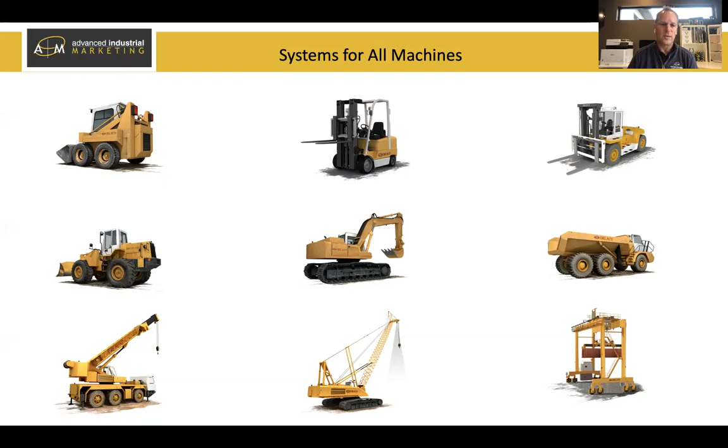One key thing we always urge customers to think about is most of your facilities have many different types of machines. Everything from small golf carts, which we don't have pictured here, all the way up to material handling cranes, many forklifts, many bobcats—there's a wide variety of machines in many industrial sites. It's important that we take a holistic view. We know you want to protect the material handling operations, but it's not always the case that every technology applies. One size certainly does not fit all.

We urge you to think about what type of machine you're applying this technology to, and how is it used. Is it indoor or outdoor? Then take a look at what you're trying to protect. Are you trying to protect people? Obviously, that's the leading cause. But are you also trying to detect other machines? Are you doing people-to-people detection, people-to-machine detection, machine-to-machine detection? Are you also concerned about damage, about hitting key infrastructure in your plants?

There's a lot of times customers come to us and say safety is my primary reason, but we'd also like to reduce damage to our machines and reduce in-plant damage. We had a use case last year where we had multi-million-dollar damage to a facility because a utility pole was knocked down in a yard. So what are you trying to protect? And that's not always the same depending on where the operation is in your facility.

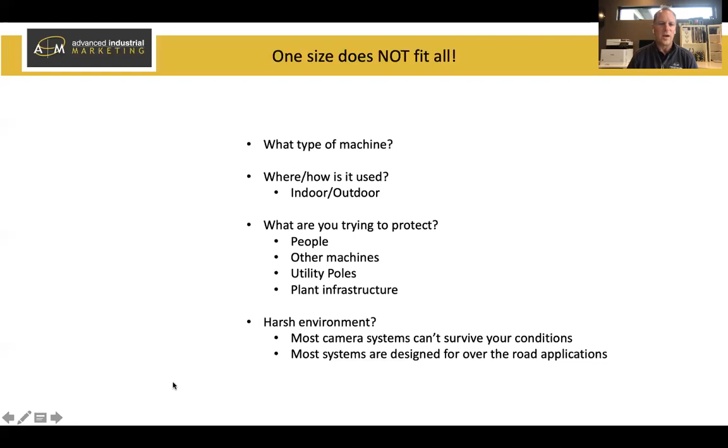And lastly, one thing we always urge our customers to consider is the environment. Most camera systems aren't designed for heavy industrial use. Most systems are designed for over-the-road applications, and there's a plethora of technology being pushed into the industrial segment that's just not designed to last. There's high shock and vibration ratings, high temperature ratings that I urge you to look at when applying this type of technology. Most over-the-road applications, your cars, have shocks and rubber tires. The overall vibration is not nearly the same as on an industrial forklift that has no shock system, no suspension system. Keep that in mind as you think about what type of technology to apply.

We're seeing a wide variety of technologies being applied in the industrial segment, and as I mentioned, most of that is being driven from the commercial sector. All cars sold in the US now have to have a backup camera on it, it's part of the federal mandate. But you're seeing a lot more with blind spot detection systems, backup warning systems, lane departure systems. All of that technology is now available for the industrial segment, being applied to forklifts, little bobcats, golf carts, and large machines. We're seeing a wide variety of technology being deployed on the industrial floor.

I'm going to briefly talk about each of them and give some advice based on what we've seen on how they are applied. Essentially, I broke it down into two groups. We've got non-proximity detection systems, which are your basic camera systems, and we also lump in wireless camera systems because we're seeing a lot of those applied in the industrial segment. And then we have proximity detection systems.

Basically, we're seeing four different technologies being deployed for proximity detection systems: ultrasonic, radar, vision, and RFID based, and they're priced in that order. So the lowest cost are ultrasonic, and the higher end stuff is vision based and RFID based. Let's jump into each of these technologies and talk about how you can apply them in your facility.

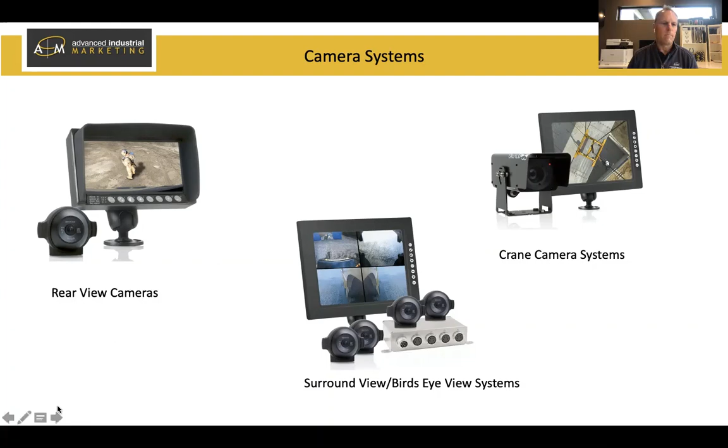Wireless camera systems are becoming more and more widely used. The reason we're having success deploying them is now we can put cameras in places they haven't been before, on lifting hooks, on stations that a forklift accesses only routinely, and we can wirelessly transmit to that forklift operator cab.

We can have wireless trailer systems. Many facilities have trailer jockeys running around, and those cabs may pick up trailer A today, trailer B tomorrow, or trailer A now and trailer B in an hour. In the past, it's been very difficult to link up to camera systems on trailers, but with the advent of new wireless technology, it's very easy to have operator views of many different trailers.

I also mentioned wireless load view systems. We're seeing wireless cameras basically on hook blocks of cranes and other load view systems where now we can wirelessly transmit that signal not only to the operator cabin, but back to a central processing unit, back to overhead cranes. We're seeing a lot more versatility of camera systems that use wireless.

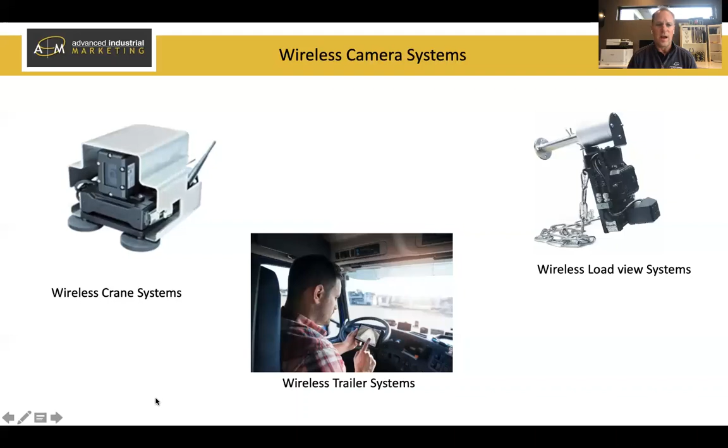All right, we're going to step up a notch here in technology and complexity. We're going to talk about our first proximity detection system, and this is the lowest point of entry for a proximity detection system. It's an ultrasonic technology, very widely deployed on commercial vehicles. In fact, if you have a proximity detection system on your vehicle, it's probably ultrasonic. They're very, very inexpensive, and quite frankly, they're not built for industrial use.

We very rarely put these on forklifts or industrial machines just because they're not rated for shock and vibration. They also need to be clean, not subject to dirt and mist for long periods of time. And what happens is if you have an ultrasonic sensor that's not rated for industrial use, it's going to go off all the time.

What an ultrasonic sensor does is it basically sends out an ultrasonic beam that really has a short range, maybe up to 4 meters, 3-4 meters, 10, 12 feet out. That ultrasonic beam is going to bounce off anything and send a signal back.

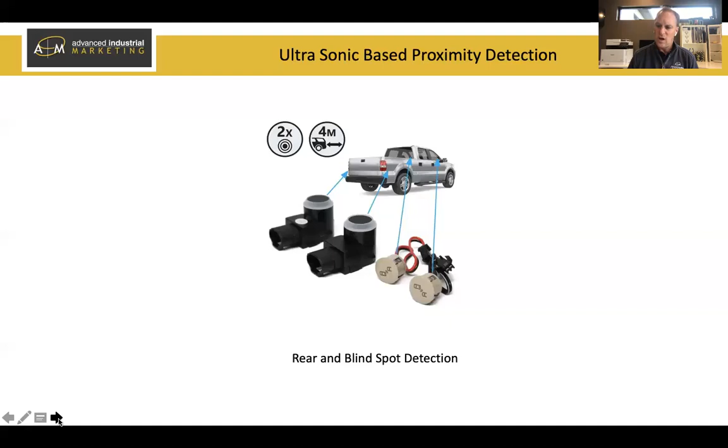There is a step up from that. The next technology that we are seeing deployed in the industrial segment is radar-based proximity detection. This is the next step up in proximity detection. You see here, we talk about rear proximity detections, proximity detection, and side proximity detection. Theoretically, you could do a 360-degree proximity detection system with both ultrasonic and radar.

But again, just like ultrasonic, radar is sending a signal out from each sensor. It's going to bounce off anything out there and receive back a signal saying something is out there. So they are not going to differentiate between a person, another machine, or an object. It's going to alarm to the presence of something out there and alert your operator.

And we do have experience with them in industrial facilities where there's mud, dirt, and they work very well because they have much more power. So if you have a larger vehicle that's indoors, outdoors, and you want a proximity detection system, we would recommend probably a radar based system. Now, I say probably because radar is very strong and it doesn't differentiate.

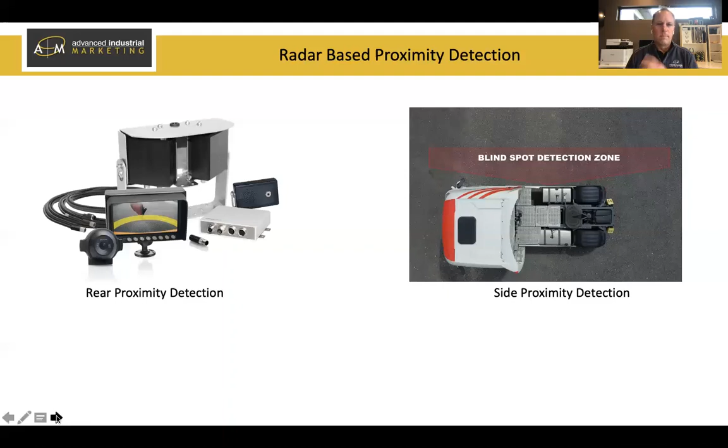Let's step up from radar. Again, keep in mind, we're working our way up the food chain here. And when I mean working our way up the food chain, we're working our way up in price. But during the last couple of years, there's been a few, not many, vision-based pedestrian detection systems being deployed in industrial settings. And I must say, as we work our way up the food chain, you're going to find fewer and fewer vendors on the marketplace who are doing this.

So if you started ultrasonic and Google ultrasonic, you're going to get page upon page upon page of people offering ultrasonic sensors. If you do radar-based proximity detection system, you're going to get less, but you're still probably going to get page and page. Google pedestrian detection, and you're going to get far, far less vendors, especially pedestrian detection for industrial machines. There's very few people who are doing this in the world right now, and it's a very, very effective system.

The key here is this is smart enough to alarm in proximity only if there's objects or only if there's people. So we're stepping up from the radar in that we're observing our area. We're teaching this camera what a person is and what an object is, and it's taught to differentiate between the two. So customers can set up zones of vision that alarm only if appropriate.

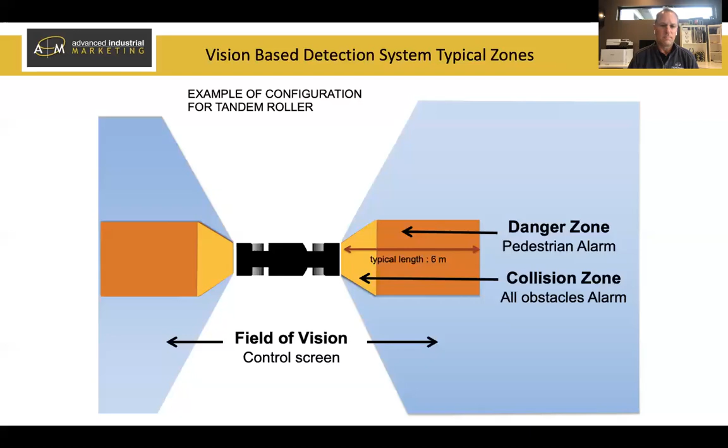The next slide is an example of a large piece of equipment, but these cameras are very easy to configure - easy point, click, and drag, and customizable on the zone. Many of you may not have a large piece of equipment like this, but you can see the yellow zone on the picture is where we're detecting all objects, and in the red zone we're detecting pedestrians only. This particular customer wanted a very small object zone and a very large pedestrian zone.

So these smart vision-based camera systems are coming more and more. We're putting them on a lot of forklifts now. We have major corporations across the US specifying these as a step up from a standard backup camera. But they are typically a large investment - you can typically get a backup camera system for less than $1,000, and these systems start at $4,000 to $5,000. So it's a significant upgrade and investment, but it gives ultimate protection as far as pedestrians go.

Rob, one quick point I did want to mention - when it comes to these vision-based systems, obviously it does need to see, but it's difficult to get 360 degrees of protection with these unless you have cameras on all sides of the vehicle, correct? That's correct. If you had an application where you really wanted 360-degree protection, it's very difficult for the vision-based system to do so. It's possible, but it gets quite costly putting this many sensors around a vehicle.

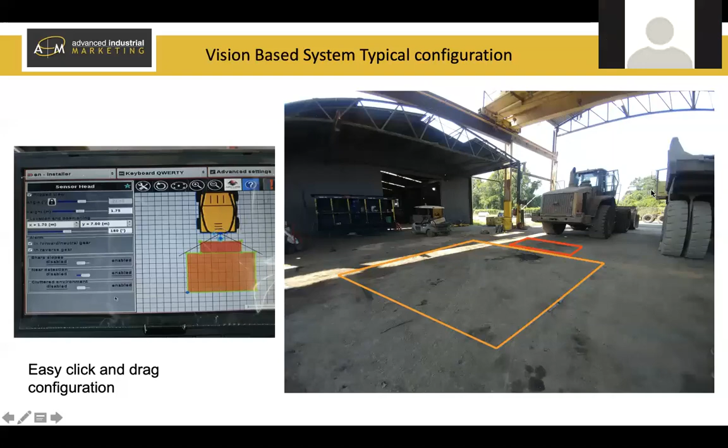The last technology I was going to talk about that we're seeing deployed is RFID-based proximity detection systems. Again, Google RFID-based proximity detection systems and you're going to see a handful of companies doing this in the world. But these are the most complete systems on the market - they're allowing customers to do much more than just machine to people or machine to machine.

With these RFID-based systems, you can track operators, do access control, crane to people, machines. So it's a very flexible and powerful system, these RFID-based proximity detection systems.

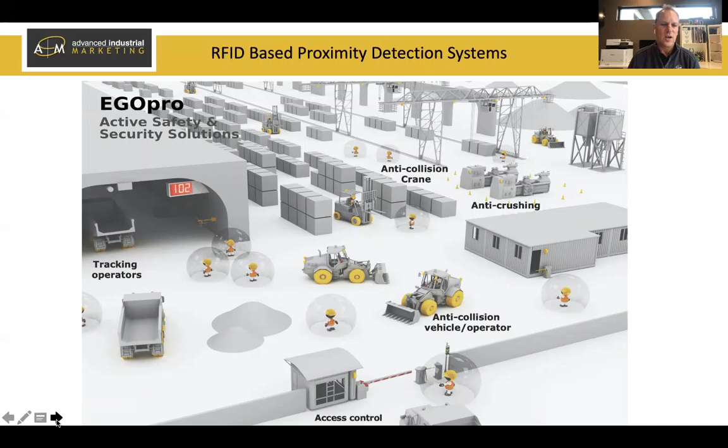Essentially, it's a marriage of a sensor. You can see the sensors here on the upper right of the screen. Those sensors interact with an RFID tag that needs to be worn by people or machines. These RFID tags

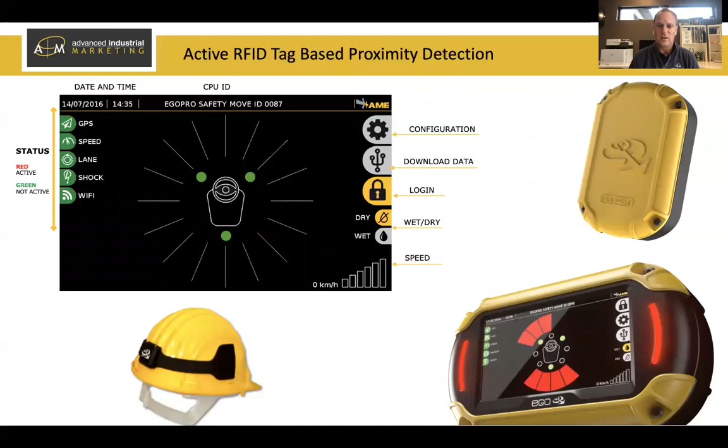We have the ability to differentiate whether it's long distance warning, short range warning, or machine to machine. So we have many different visual warnings for your operators, and he'll understand whether it's a person, an object, or a thing, and whether they're long distance or short range.

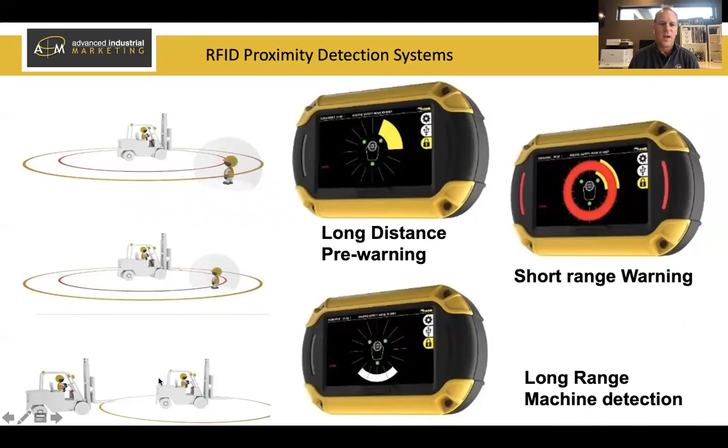So RFID-based is the most effective for 360-degree protection. The way these sensors work, they use microwaves, and it's a very encompassing and powerful wave that acts like an amoeba. We've used microwaves to see around corners, so we can do blind corner cross warnings. Microwave and these RFID-based systems are the most effective way to give you 360-degree protection.

But the biggest complaint we get against RFID systems is that everyone needs to be tagged. It's a common complaint against RFID-based systems, the inability or concern of customers to manage the tags. Everyone on the floor has to have a tag. Every machine has to have a tag. Every key asset that you want to alarm has to be tagged.

So it is perhaps a cumbersome task, but our company is deploying this system in many cases across the USA, so it can be done. I don't want to dissuade you, but the common complaint we get against RFID-based is the tag management.

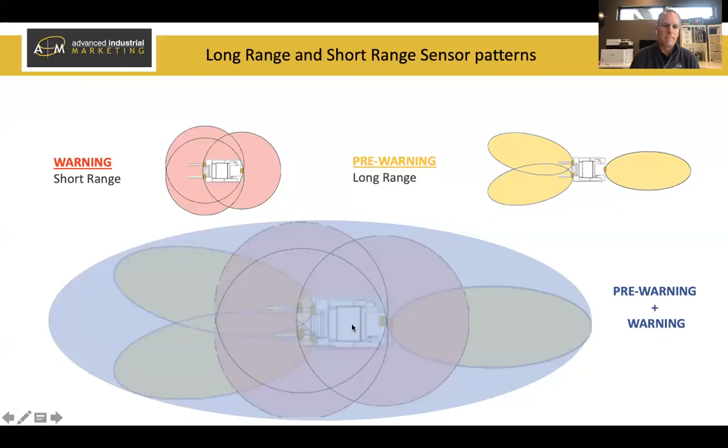And that is something, Rob, that it's just an investment on the team and team members and whoever's facilitating the PPE of the workspace. There's a lot of different ways they can wear tags via hard hats or lanyards. So a lot of different form factors. Yeah, exactly. Belt clips on your hard hat, in your pocket, a variety of different ways. But there's no doubt about it, the tag management is something I urge you all to think about as you're looking at proximity detection using RFID. I want to move through this as we keep going.

Another powerful thing about microwave-based RFID is it gives you the ability to do some geofencing and indoor zoning. If you mount sensors in key places in your facility, those sensors can communicate with the machines on the ground and create safe zones or other objects.

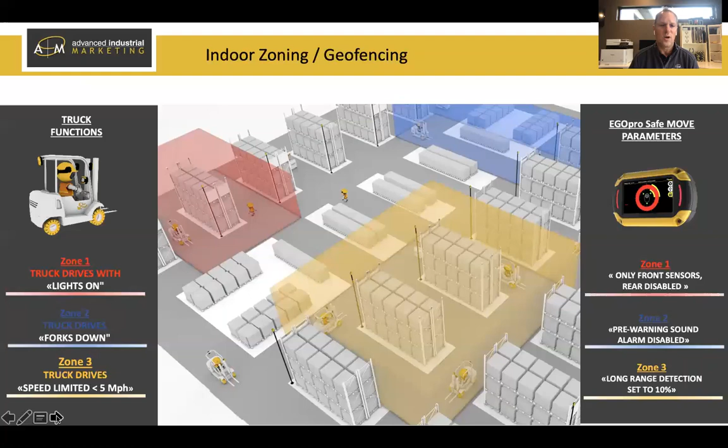So these smarter systems, the RFID-based system and the vision-based system, do have the ability to interact with machine control. That's a topic for a whole other webinar, so we won't get into it, but just know these smarter systems have the capability to communicate and do something with your forklift. It gets quite complicated, but it's not unattainable, it's something you can do with coordination with us and your forklift dealers.

Last but not least, before we get into some quick application photos, another trend we're seeing in these two smart systems, vision-based and RFID-based, is that they're collecting data. They're starting to log all these interactions. The data is being stored on these machines, and we have customers getting this data off the machines and using it for metrics and measuring, using the data as a way to measure improvement in your process.

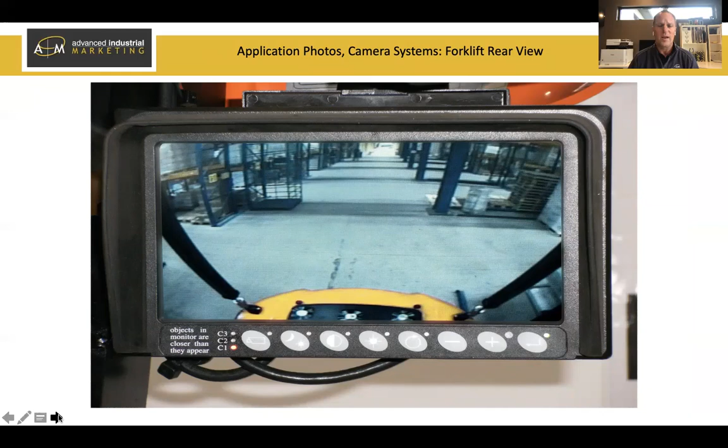In an effort for time, since I'm running a bit over, we're going to dive into some quick application photos. I mentioned the rear view camera systems for forklifts. This is a quick picture of what customers are hoping they can help their operators with—increasing the ergonomics and eliminating him looking around—a quick rear view from a standard camera system.

Another system we're deploying that is very popular right now is Fork View. This particular camera is mounted mid-mast. If you look closely, it's giving your operator a view of his forks, a wonderful view especially for overhead lifting applications. It improves safety, but also efficiency, helping your operator nail his spot quicker than trying to look up overhead.

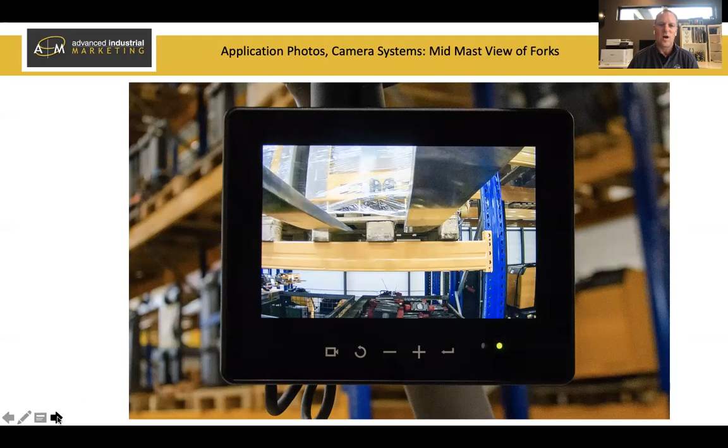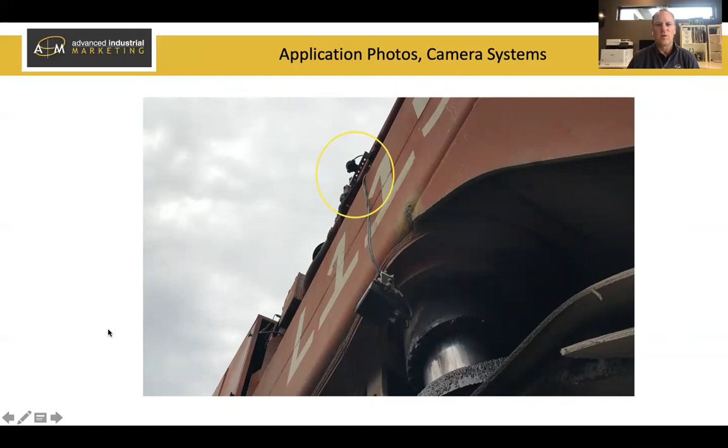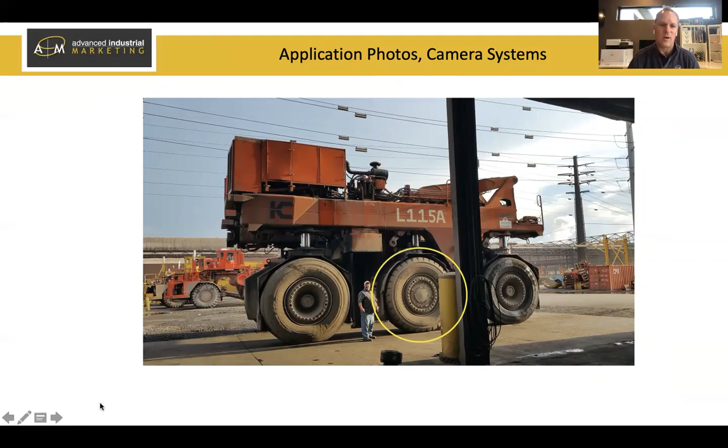This is a cool example we like to show, on a very large piece of equipment. The motivation was to mount this camera on the machine—you see it circled here, a little eyeball camera—to protect this middle tire. That tire costs about $15,000, and they have a blind spot there, so that tire gets nicked very often. Most of you don't have machines this large, but this is an under-$1,000 camera system they mounted to try to save a $15,000 tire and help their operator in this instance. A very cool application.

And I mentioned bird's eye view—look at this image. This is something a supplier from Germany is offering, called a Mobile Vicinity Scout. It's a 360-degree view. For those who don't know, this is a Linde forklift, but this would give your operator a bird's eye view of what's happening around him. It's really cool technology—if you want more information on how this works and how it's put together, that's a topic for another discussion, but we can get into it. These bird's eye cameras are becoming more and more popular, available on many new car models, and believe it or not, we can deploy them on industrial machines too.

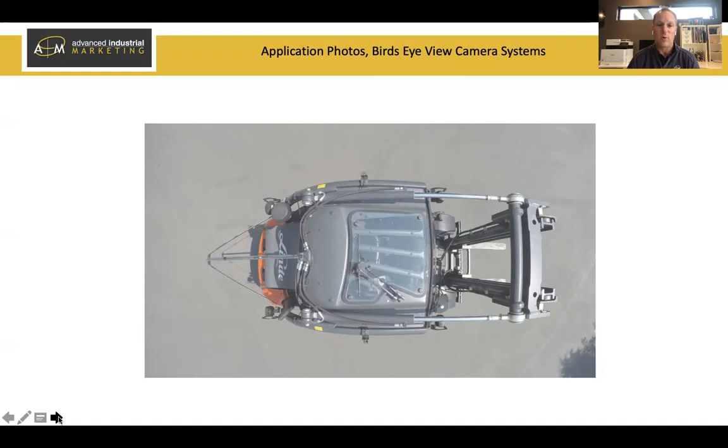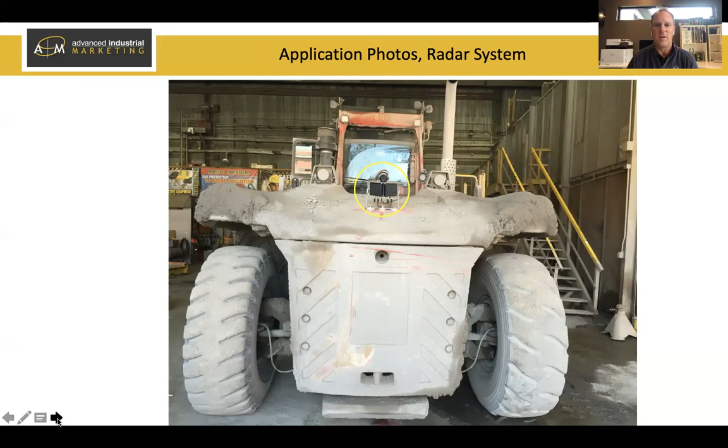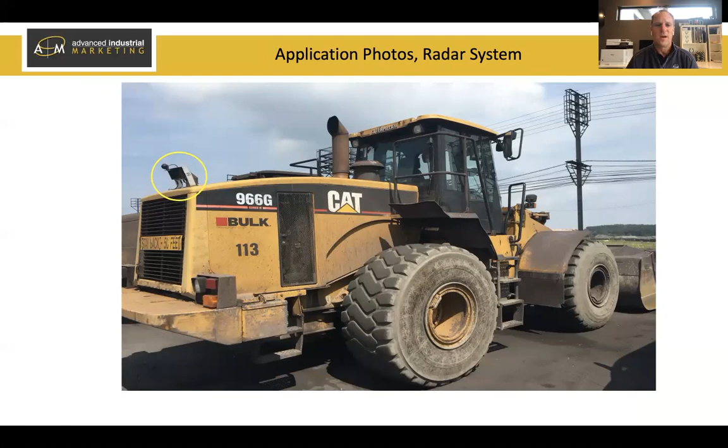Radar-based systems—you saw on our earlier slide that it's a radar sensor coupled with a camera. We really don't deploy these on small forklifts, though it's doable, but these pictures are on large pieces of equipment. Notice how dirty this is? Keep in mind radar works great in dirty environments, and believe me, it doesn't usually look like this—it's just as covered in mud as the rest of the machine. Again, radar on larger pieces of equipment. This is a rear radar system, a typical application for that.

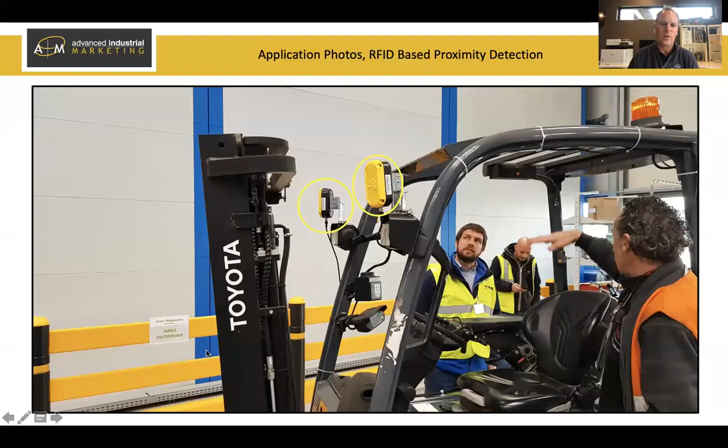RFID-based proximity detection systems—it all starts with the sensors. These sensors are typically mounted strategically around forklifts. This particular Toyota has 2 mounted in the front and 1 in the back, giving 360-degree protection. This is a different shot, but the back has 1 sensor, and the display for the operator is mounted in plain view so he can see when it audibly alerts him and where the danger is. Typically on a forklift many of you have, we're putting 3 sensors; a larger forklift could have 4, but a typical setup is 2 sensors in the front around the mast and 1 in the rear.

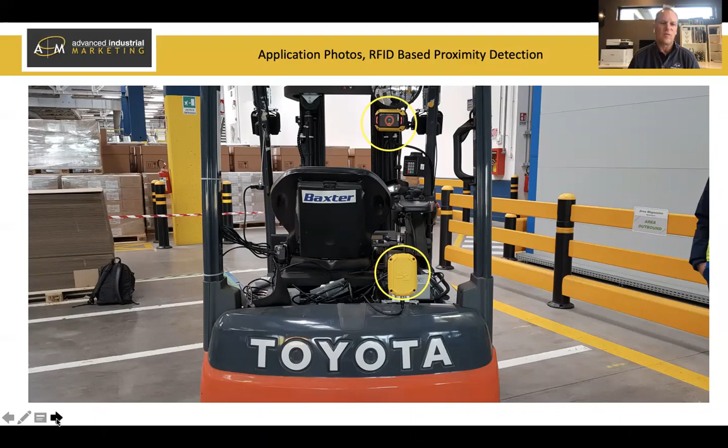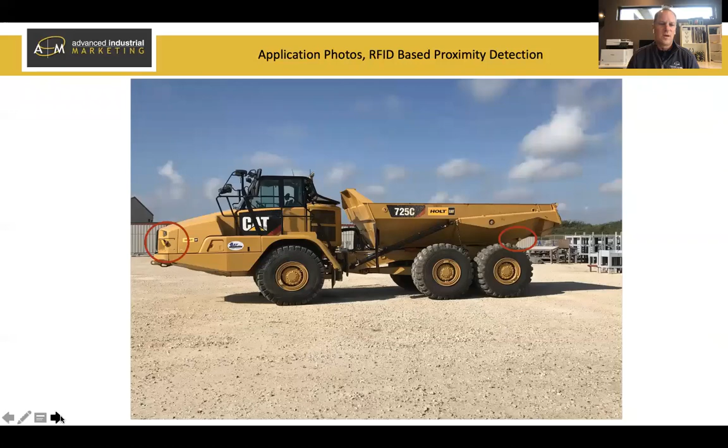The vision-based systems that I talked about, the smart cameras, are typically mounted in the rear because we don't do a lot of forward-facing with vision-based systems since they have to see. So if you have a load or an attachment in the front of your machine, a vision-based system isn't going to be able to see around that. It is a problem. So with vision-based systems, we do a lot of rear-facing.

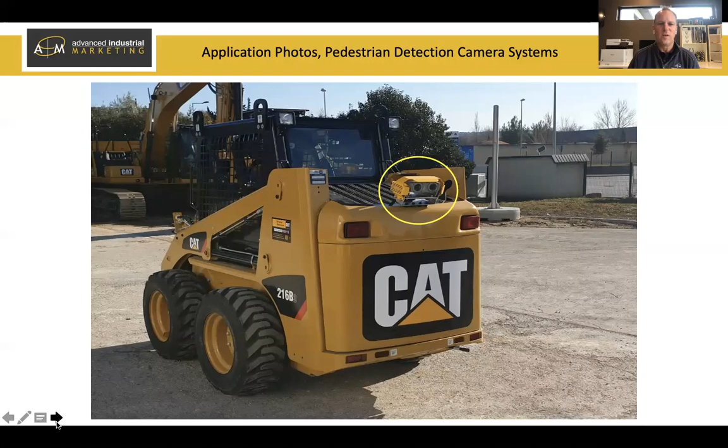So if you have an indoor-outdoor piece of equipment, make sure your processors are rated for indoor-outdoor use. Across the spectrum, there are a few companies offering these systems that don't offer weatherproof processors. We highly recommend getting one that's rated for high shock and vibration, and for indoor-outdoor use, because a lot of your forklifts have space limitations and these processors can't always be mounted in an environmentally controlled area. So look for processors and sensors that are high shock and vibration rated, and rated for high temperature extremes.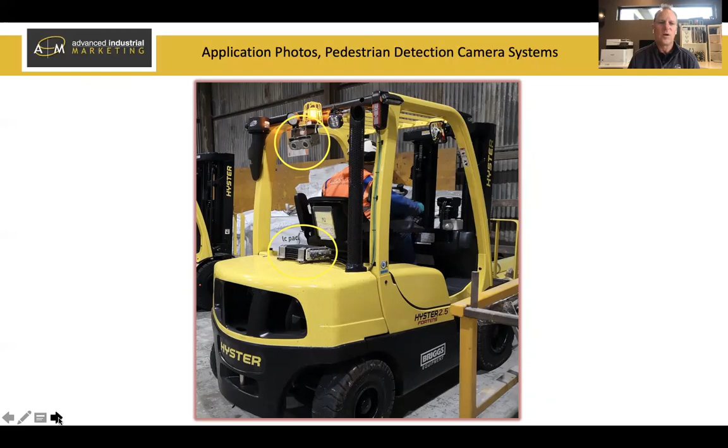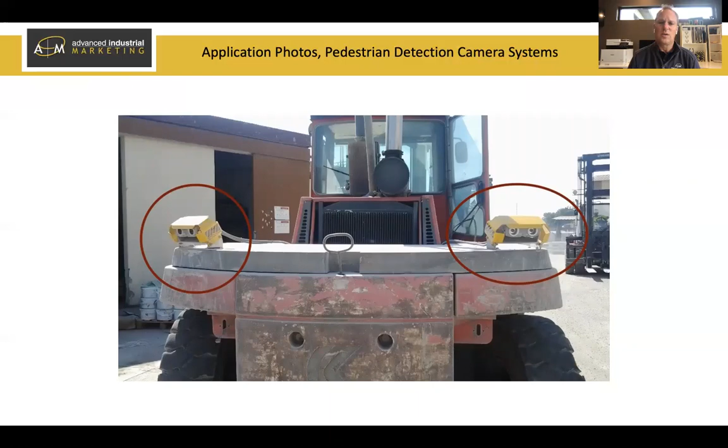I mentioned that the vision-based system has to see, and Andrew brought up the question of 120 degrees. Sometimes on larger pieces of equipment, 120 degrees just isn't big enough, so it's not uncommon to mount more than one vision system. In fact on larger machines, how about 3 sensors? This is a big telehandler piece of equipment. Many of you may have never seen one of these, but this particular one has 3 vision-based systems on it. And Rob, those multiple images can then be stitched together on a monitor in the cab, right?

That's correct, yeah, very similar to that. And they alarm - you can wire them to be independent alarming or one alarm, all alarm. They have smarts to them on how they alert the operator.

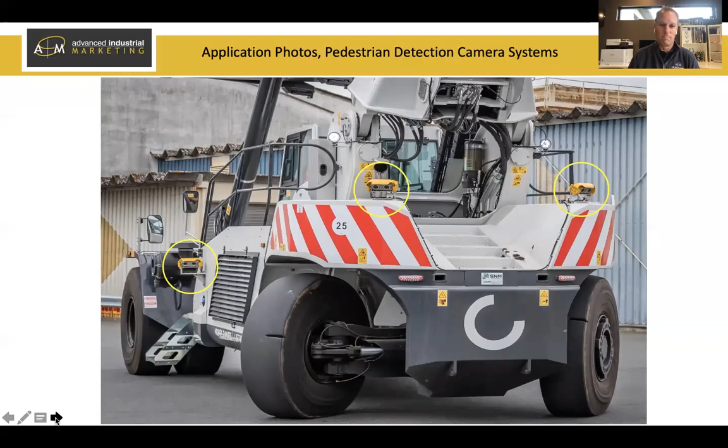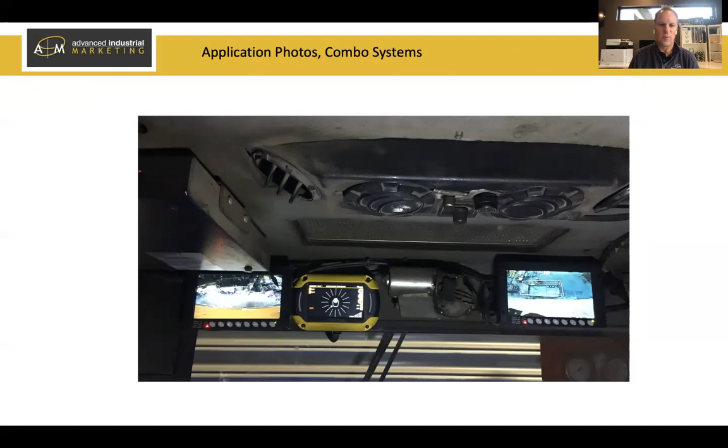Last but not least, not the best photo in the world, but I wanted to show you that it's becoming more and more common for customers to combine systems. This particular customer felt they needed a simple, inexpensive camera to aid their operator. They've got 2 cameras here, a left view and a right view, simply to aid him in the blind spots. But in the middle here, they've got a proximity detection system giving him 360-degree protection for people - this is a tag-based system. So this particular machine, a very large machine, has both. They want to help their operator with blind spots, and also make sure pedestrians are safe in the area.

Last but not least, we're seeing a lot of coordination with other accessories. Projector systems are very popular right now - we could put sensors in your environment that detect a forklift coming and project a sign down on the ground that says danger, forklift coming. We could do the same for doors, indoor or outdoor, for machines coming in from outdoors, projecting a blue light on the floor to let people know something's coming. Halo systems are red and blue lights going around forklifts. Driver fatigue systems, impact sensors - all of this technology we're seeing deployed on regular everyday forklifts. So if you can dream it up, there's a vendor out there for it, and you'll see it more and more.